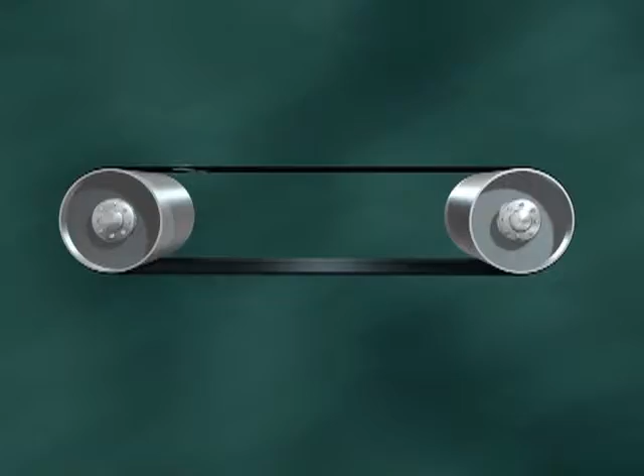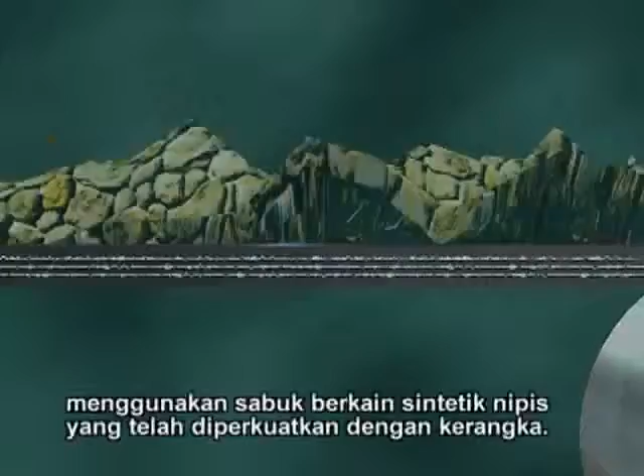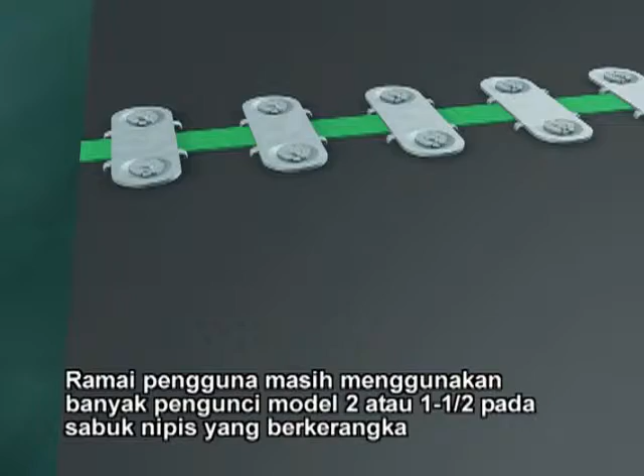Like most conveyor belt users today, you probably use belts with a synthetic fabric reinforced carcass. Synthetic carcass belts are thinner than older style belts with a thicker cotton carcass. Many users are still using larger number 2 or 1.5 style fasteners on thinner belts that have a synthetic carcass, without knowing that these types of fasteners were designed for thicker belts.

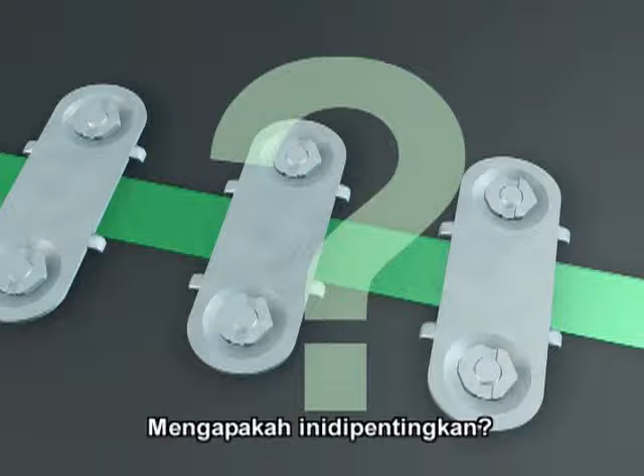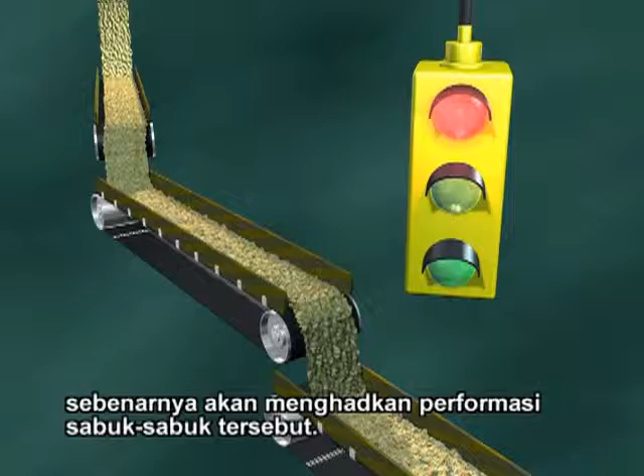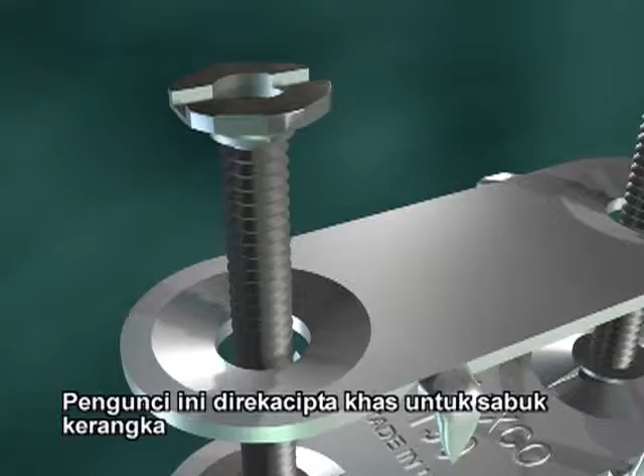Why does this matter? Used with today's thinner belts, number 2 and 1.5 fasteners may actually limit belt performance. The answer? Flexco 190 and 140 Quick Fit bolt solid fasteners. The fasteners specially designed and engineered for today's stronger, thinner synthetic carcass belts.

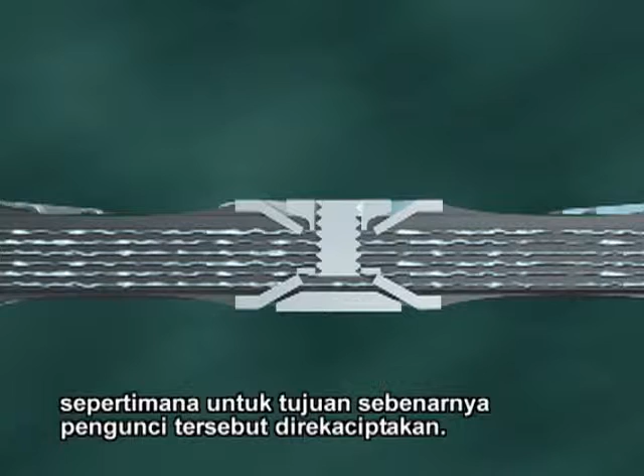Let's take a closer look at the differences between the older style and the newer style fasteners. Number 2 and 1.5 fasteners worked well on thicker style belts for which they were designed. But the thick cup of a number 2 fastener sinks deeper than necessary into a thinner belt, with the sharper edges potentially damaging carcass fibers and weakening the belt.

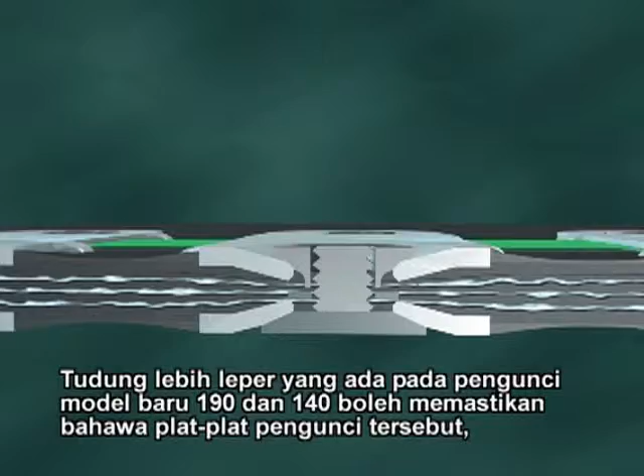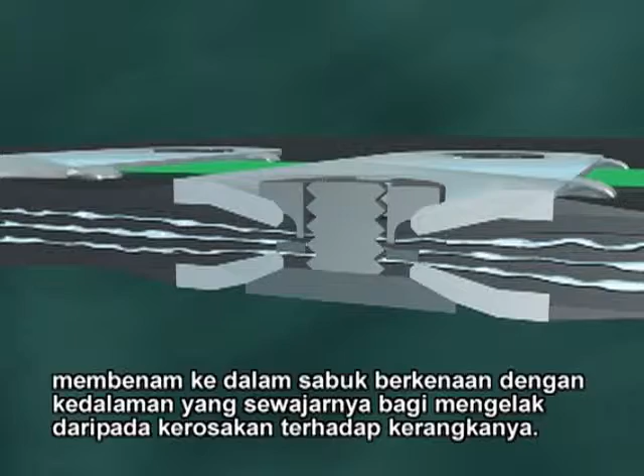The shallower cups of the newer style 190 and 140 fasteners ensure the plates sink the proper depth into the rubber, avoiding damage to the belt carcass and maintaining overall belt strength. Older style fasteners will also sit higher on the surface of thinner belts, creating a catch point for cleaners and idlers. The newer style fasteners have been designed to have a lower profile, reducing the risk of interference with belt cleaners and other equipment.

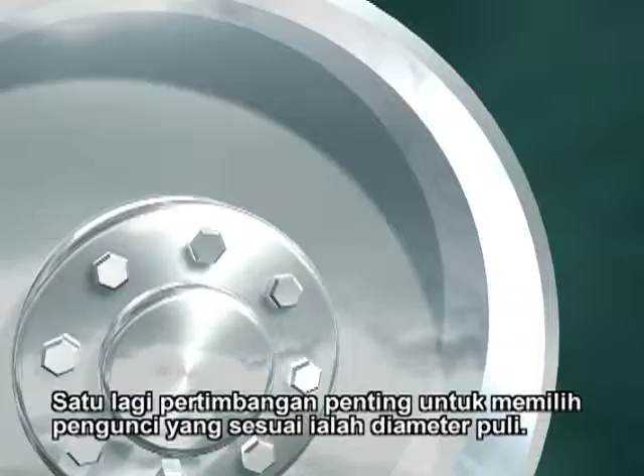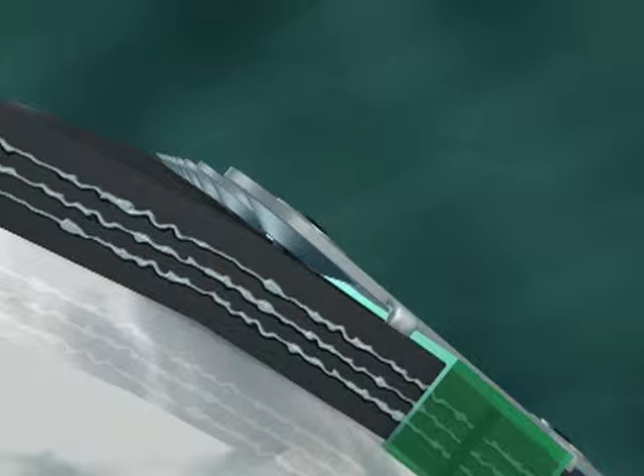Another important consideration in proper fastener selection is pulley diameter. For example, the older style number 2 fasteners are not recommended for pulleys smaller than 750 millimeters in diameter. Operation on any pulley smaller than that can, over time, cause the fastener to pull from the belt and weaken the splice. Whereas the newer style 190 fasteners work on pulleys as small as 450 millimeters in diameter without a problem.

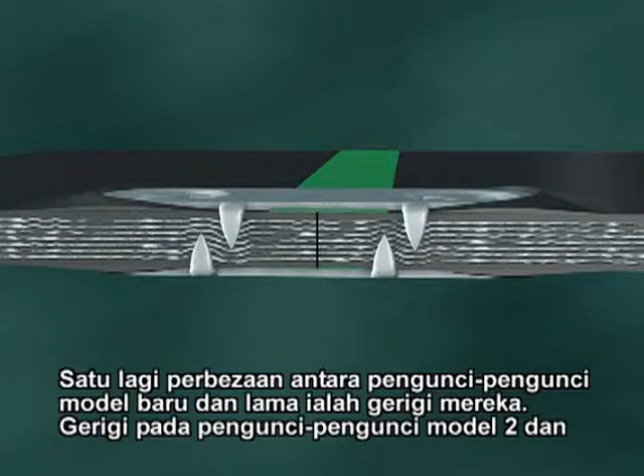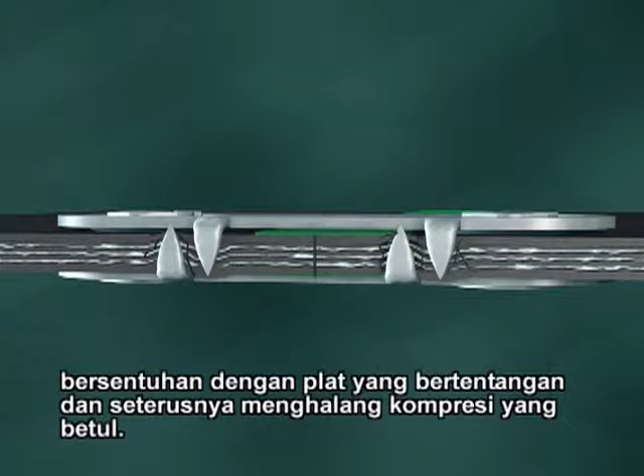Another difference between fasteners is in the teeth. The number 2 and 1.5 style teeth worked well on thicker belts. But on today's thinner synthetic carcass belts, the teeth can come in contact with the opposing plate, preventing proper compression. Since this problem doesn't happen with the newer style 190 and 140 fasteners, a stronger, longer-lasting splice is ensured.

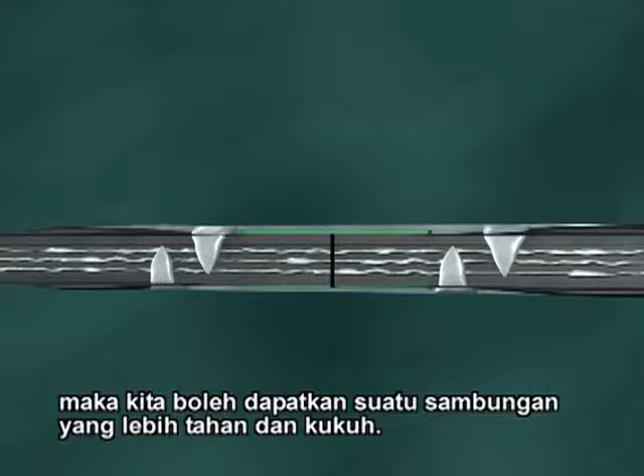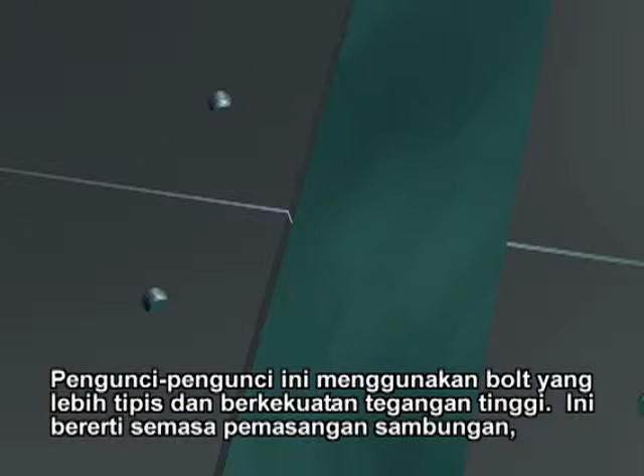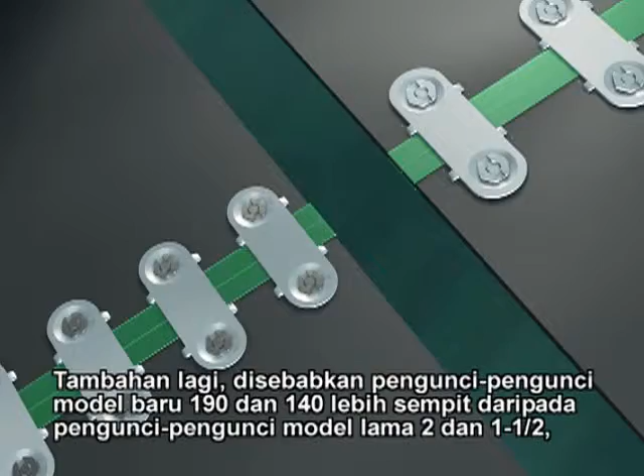The newer style 190 and 140 fasteners are superior in a number of other ways too. These fasteners use thinner, high-tensile strength bolts. This means smaller holes can be drilled through the belt during splice installation, cutting fewer carcass fibers. Additionally, because the newer style 190 and 140 fasteners are more narrow than the number 2 and 1.5, more of them can be used across the splice. This again creates a stronger, more dependable joint.

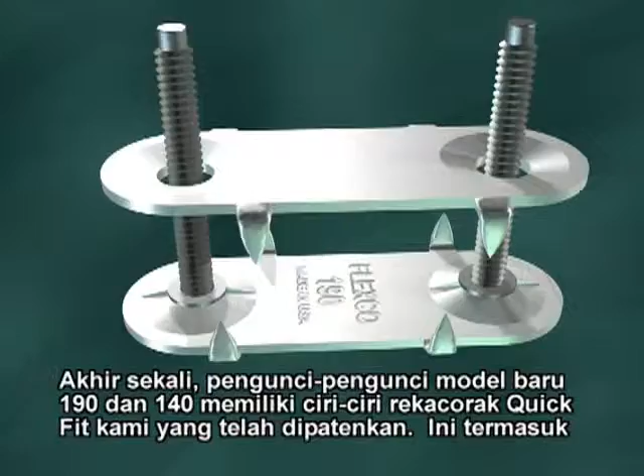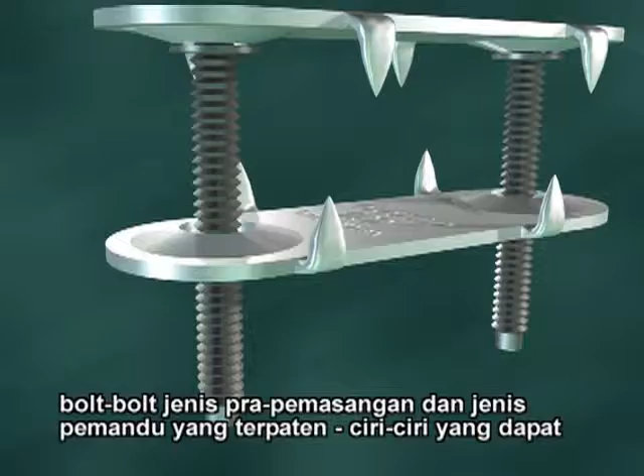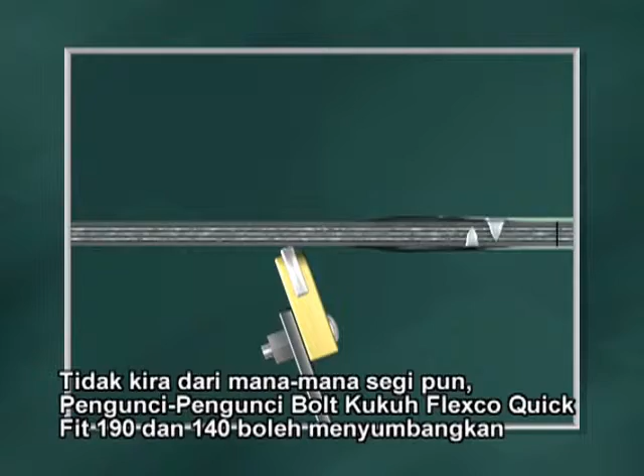Lastly, the newer style 190 and 140 fasteners feature our patented Quick Fit design. These include pre-assembled mounting bolts and patented piloted bolts, features that lead to fewer steps, easier handling, and faster installations. No matter how you look at it, Flexco Quick Fit 190 and 140 bolt solid fasteners deliver a superior, longer-lasting splice that works better with today's thinner belts, smaller pulleys, and modern conveyor designs.

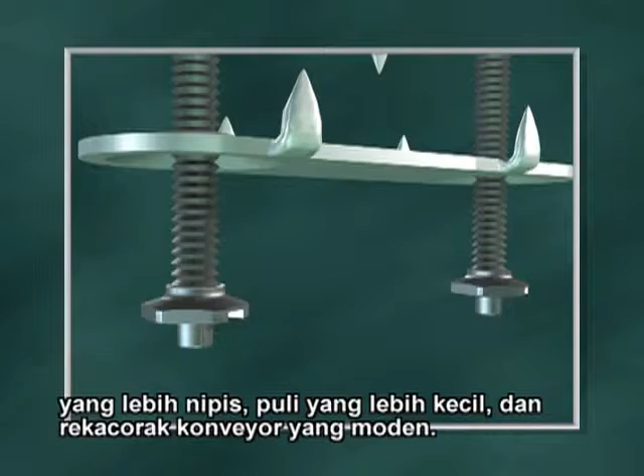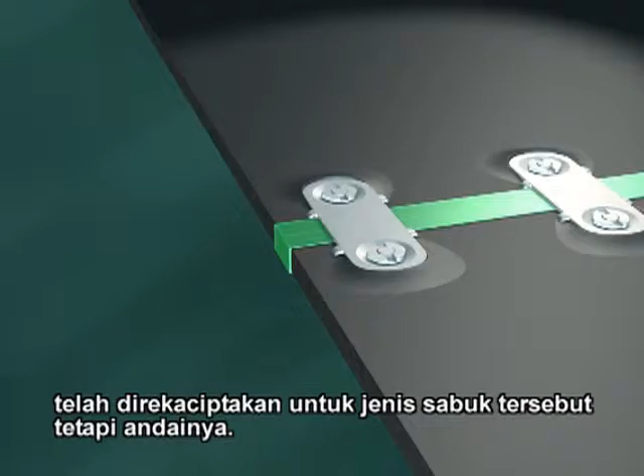If you're still using thicker belts, continue to use the number 2 and 1.5 style fasteners made for them. But if you're using a thinner synthetic carcass belt, Flexco Quick Fit 190 and 140 bolt solid fasteners are clearly the better choice.